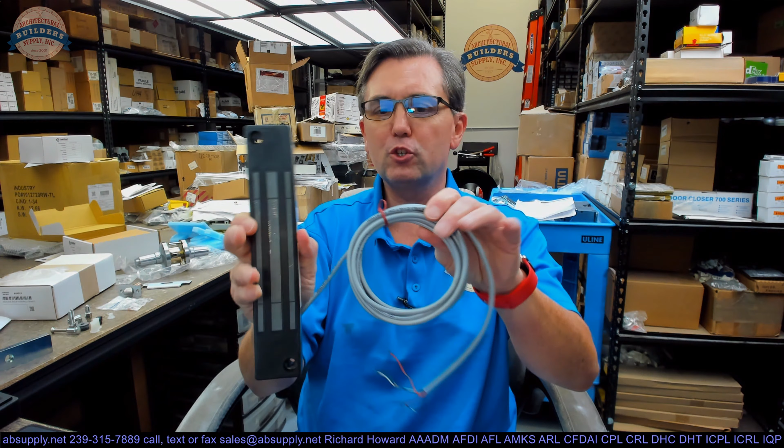Okay, so let's talk about what this is. Let's do a visual tour first. Obviously, you're going to get the magnet. So first of all, this is what is called a face mount, meaning rather than attaching it from the underside, you attach it through the face of the unit.

We'll look at a couple of diagrams in the installation instructions, but Maglocks are generally mounted on the push side of the door, right? So it's going to be mounted to the underside of the header, then the armature will be mounted to the face of the door. The door will come closed and make contact like this. Well, what if you were mounting it on the pull side of the door? What would happen in that instance is you would likely mount the magnet on the header.

Just in your mind's eye, think of a cross-section of a door and frame, a head detail. Mount the magnet on the face of the header on the pull side. The door is closed. Now imagine an offset bracket that mounts to the face of the door and then comes up in a Z fashion, and then the armature mounts to the inside of that Z so that it will close to the face of the magnet.

So if you have an in-swinging application and your hardware's on the inside, and yeah, it does happen occasionally, you're going to need a face mount. Making it work in a non-face-drilled application could be accommodated somehow with weird angle brackets and whatnot, but you ideally want a face mount model.

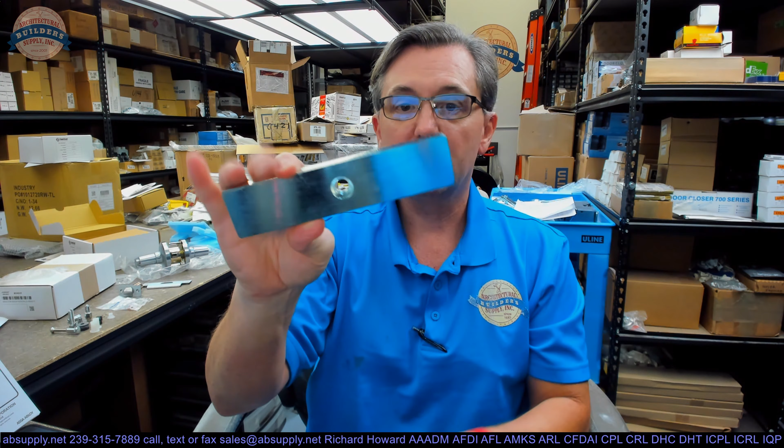So then we have our armature, or our strike as they call it. This is going to be mounted to probably an angle bracket or whatever you're installing that to. That's going to be through bolted. The fastener for that is here. Let's actually go through the fasteners. We have a couple of Allen drive machine bolts. That's going to be for the body going through or into the header.

Before you get there, though, you're going to have a couple of what would be called blind nuts or riv nuts, or I guess collapsible nuts. You need 2 of them, obviously. One of them is going to come with the tool already installed. So what you see here is when I remove the riv nut, this is the tool, everything here.

You drill the hole, push this in, bring your tool, and then tighten with an Allen wrench, and you'll collapse that riv nut onto the thickness of whatever you're installing it to, your hollow metal frame, your aluminum frame. You keep tightening until it completely collapses. And the installation instructions say, be sure you're pushing forward so that it doesn't creep out a little bit. Lots of forward pressure and tighten that down.

Once that riv nut is collapsed, you'll do it the second time by removing the tool. Everything down here with the bolt is the tool. You will certainly have a couple of caps for the body that are going to allow you to cover off your installation so that it looks nice and clean. Then you're going to have your sex bolt and your machine bolt for the armature or the strike. You'll have some other components here, and we're going to go over those as we get into the installation instructions.

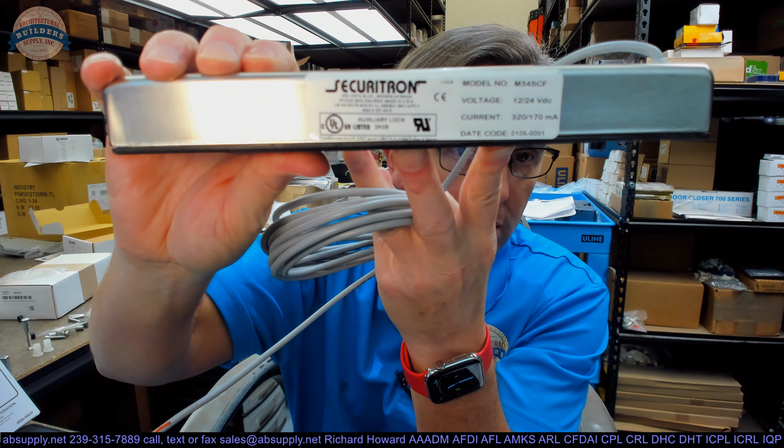Now, admittedly, as I had said earlier, this is a discontinued model. I do have some archival catalog information. I can tell you that it's auto sensing. This will run on either 12 or 24 volt. You don't need to worry about what it is. The coil will handle either condition that you bring to it. Let's switch to the screen view and let's look at all the supporting information.

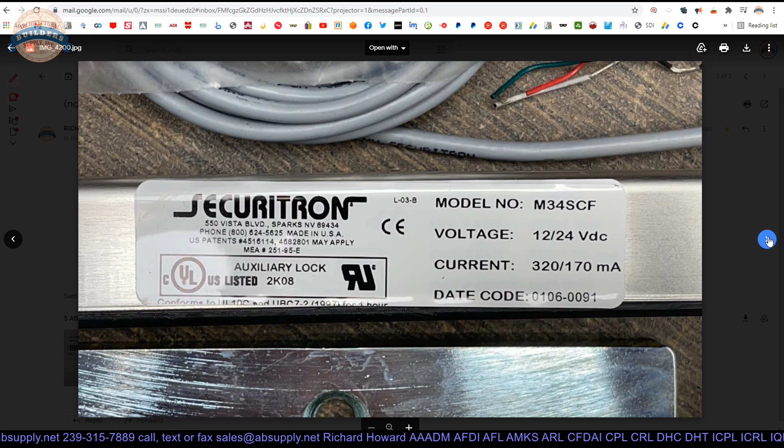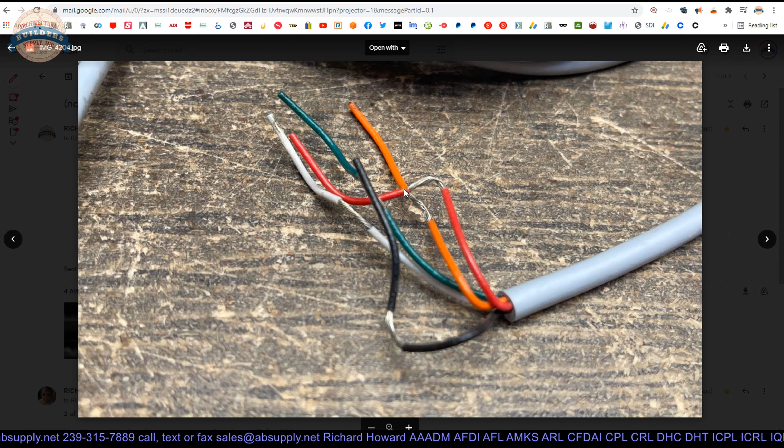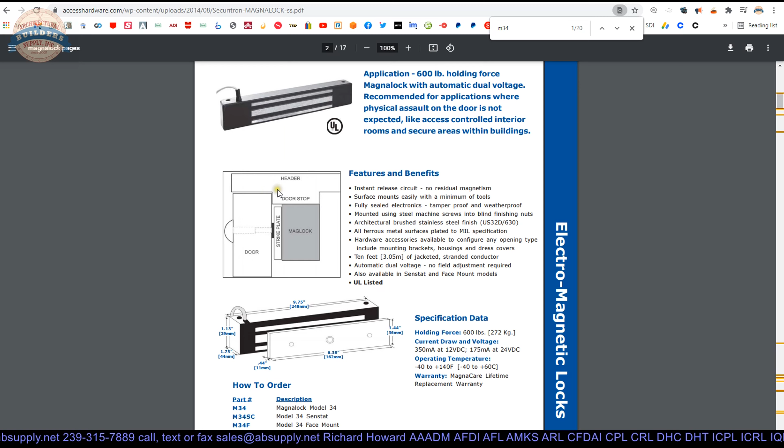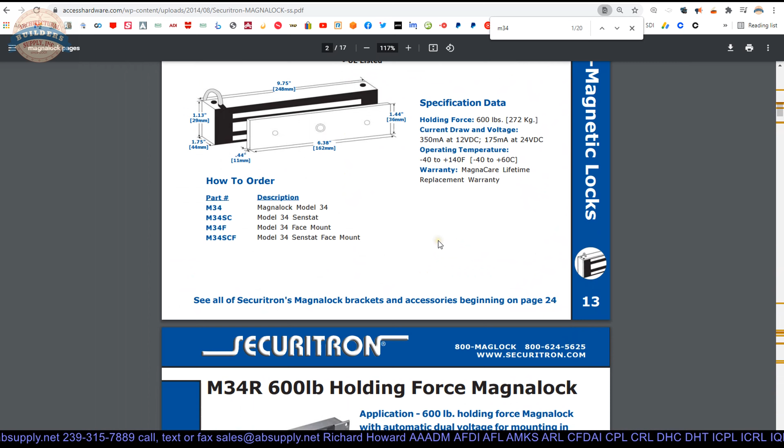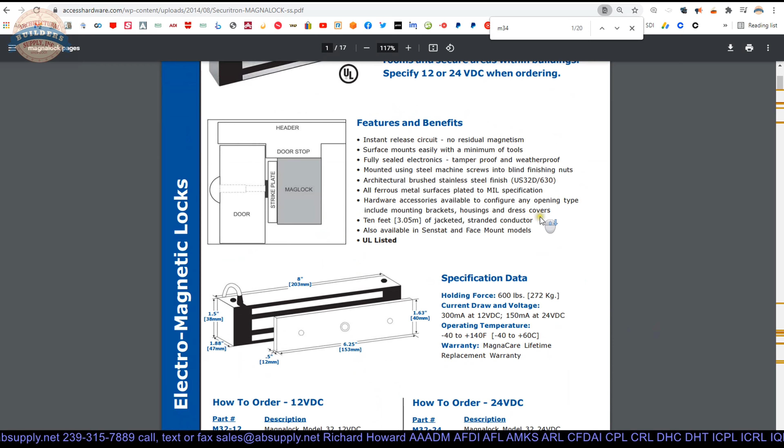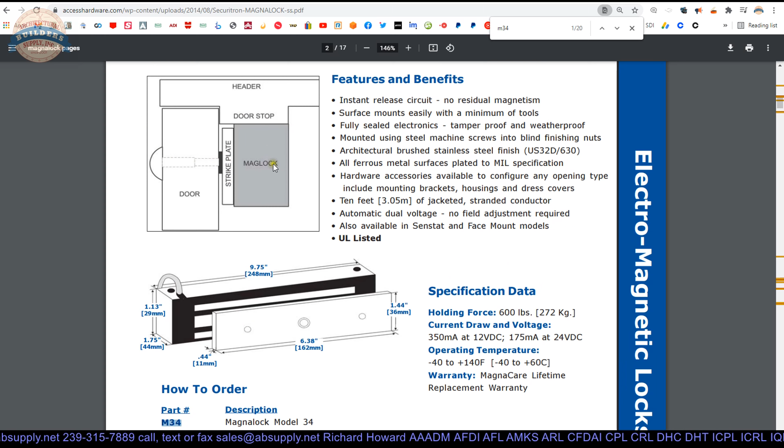Okay, now let's take a look at the cut sheet that's down below. A single-page document that shows us an overview of this M34 magnet. Now, I don't know the year of this document, but I believe it to be pre-2012, and I say that because I know it's pre-2012 because the M34 is not in my 2012 catalog. So here's what you're looking at. Now the M34 here, this is just going to be a straight M34 that you see drawn here. Well, again, if you needed to take this body and mount it to the face of the door, you're going to need bolts through the face.

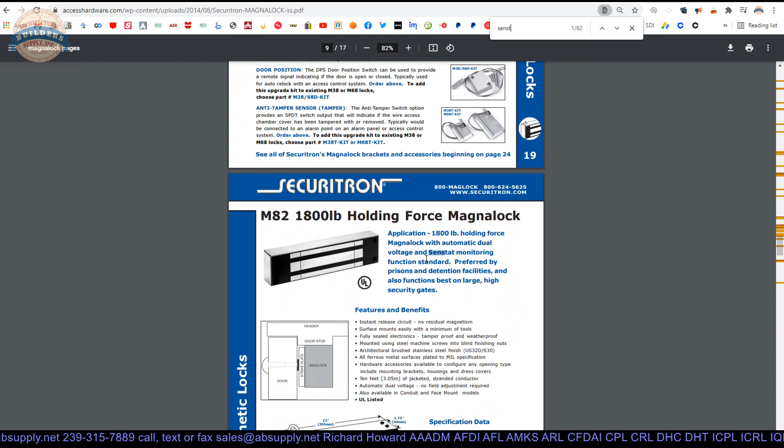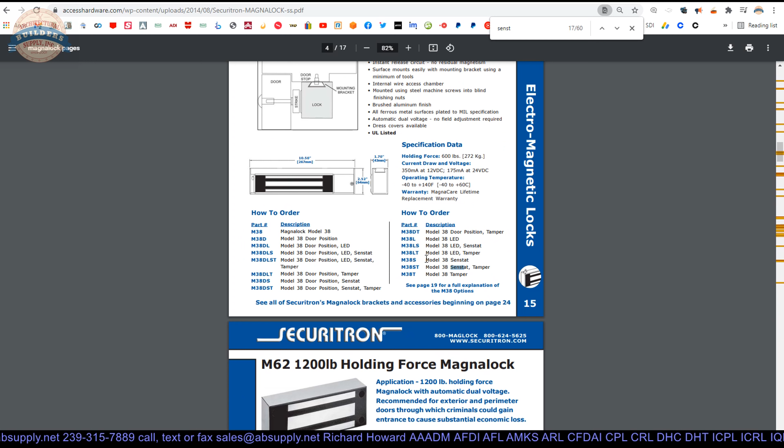So Senstat is a term that they have in here. It's a marketing term. And I don't know if it's going to be defined in the product catalog. It ought to be. Yeah, sure it is. Senstat. The Senstat option provides a lock status sensing signal which positively indicates that the door is secure. This interfaces with access control or alarm systems and is superior to the commonly used door position switch, which indicates that the door is closed, but not that it is secure. All Senstat Maglocks use a Form C switch. Okay. Form C just means a single pole double throw.

Why is it superior? Well, it's superior because it's completely concealed. Nobody knows that you have a door position switch over the opening. You couldn't tell at all. It's also superior because it tells you two things. The door must be in the closed position for this to work, and it will report back by changing the state of the Form C switch that it's secured, that you have a magnetic bond. So it gives you both a door position switch and a magnetic bond sensor as well. So it's a two-in-one sort of situation. That would be why I would imagine they are going to call it superior.

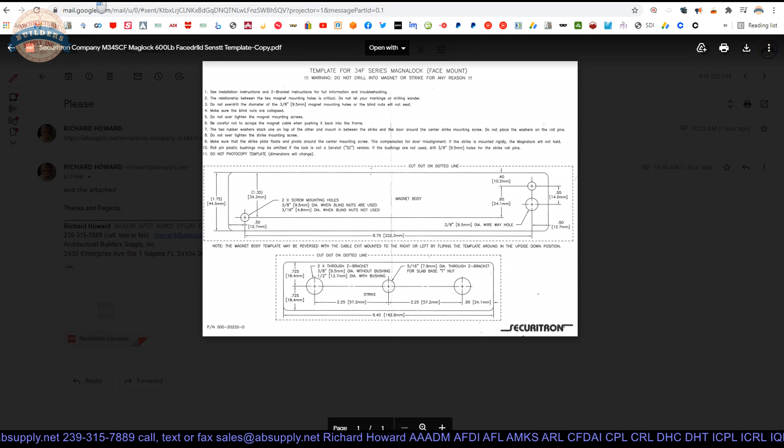Okay. Now we also have the template. This is packaged in the box. I couldn't find this online anywhere, but anyone looking in the future will find it. Full-size paper template. That's going to allow you to apply that right to the opening, right to the header. Okay, so we have that template there for you to review. They're going to want a 3/8 diameter wire hole right there. 5/16 hole through Z-bracket for slab base with the T-nut. Yeah, okay, we've got that.

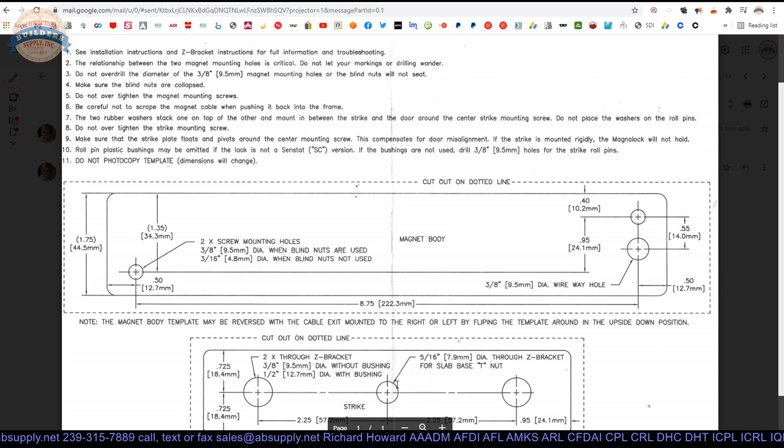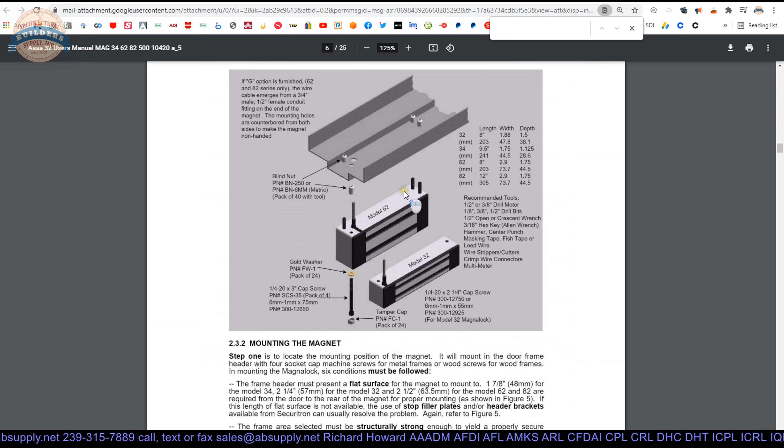Now, installation instructions, here they are as well. What is supplied does not specifically refer to the M34 face mount. But we'll scroll through here and pick out the important concepts. Here's a great way to look at a standard unit, how it mounts. That's obviously mounted on the push side of the opening.

Well, if you need to flip that around, and by the way, the other components that I didn't draw your attention to earlier, those washers are in there. Those bushings are there with these roll pins. And the roll pins are going to fit into the back side of the armature. On the back side of this, it has a couple of small holes that are drilled. Those roll pins are going to fit in there. A couple of rubber washers. And there is this bushing as well that's there underneath the bolt. You have a lot of force. When the unit is energized and the door comes to the closed position, it's going to grab that magnet. Those rubber washers are there to help deaden all of that.

So these two bushings, the roll pins, this bushing, this male bolt, then the female sex bolt really is what it is. The rest of that's all in the package. There are a couple of washers here as well. Small zinc dichromate washers. I don't, at this moment, know where those go.

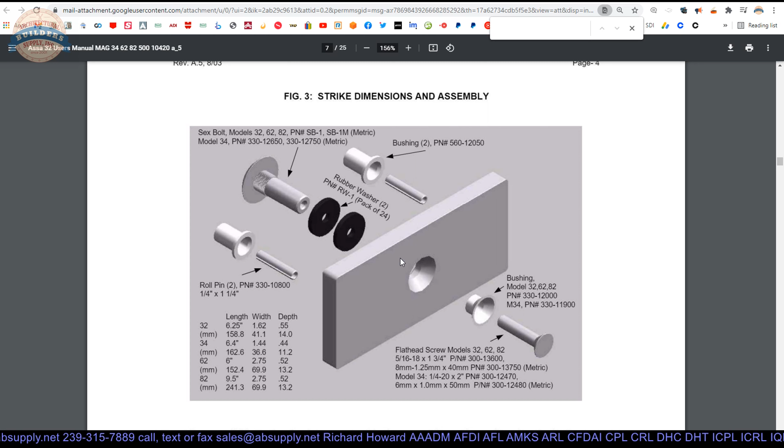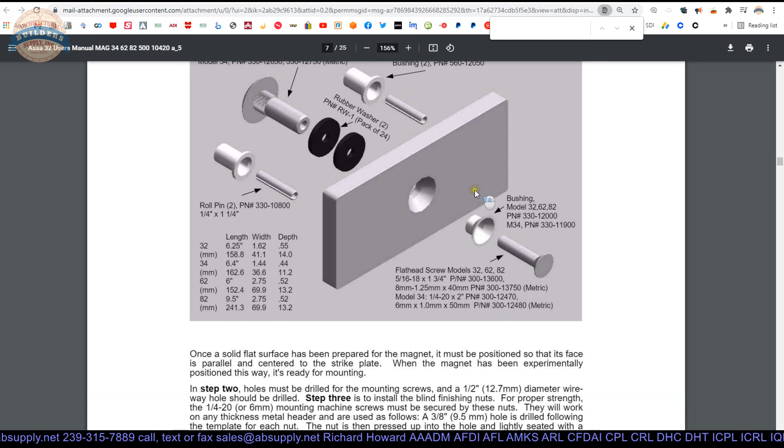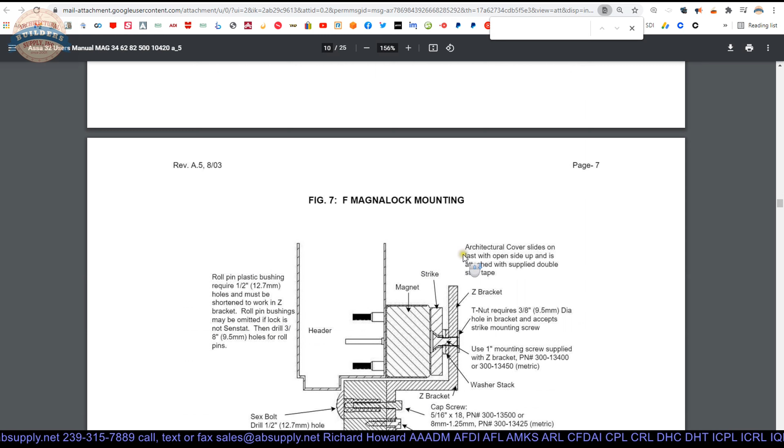I'm pretty convinced that, yeah, okay, that's probably where they're going to go. Let's take a look. Yeah, there it is. That's exactly where they go. These gold washers go underneath the head when we're doing the face mount, which is right here, basically. Nope, that's not the face mount.

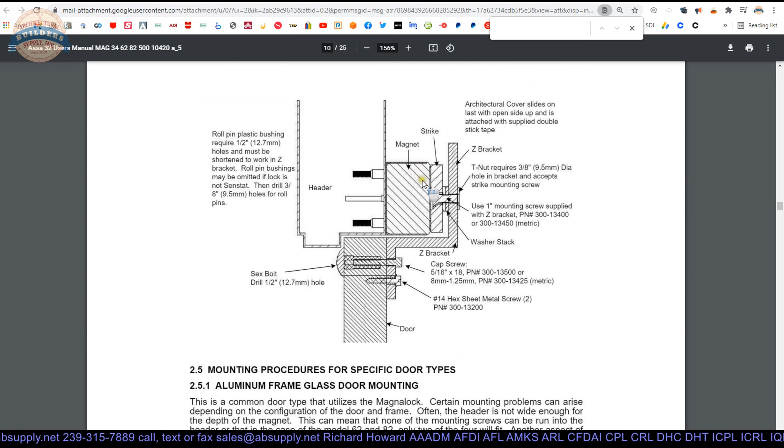In swinging door. So they show a 32F. What they're not showing us here are the bolts that go through. Well, the washer, this gold washer, will go underneath the head of the unit. Coming back up to where we were, here's the tool to collapse the blind nuts, or riv nuts they call them.

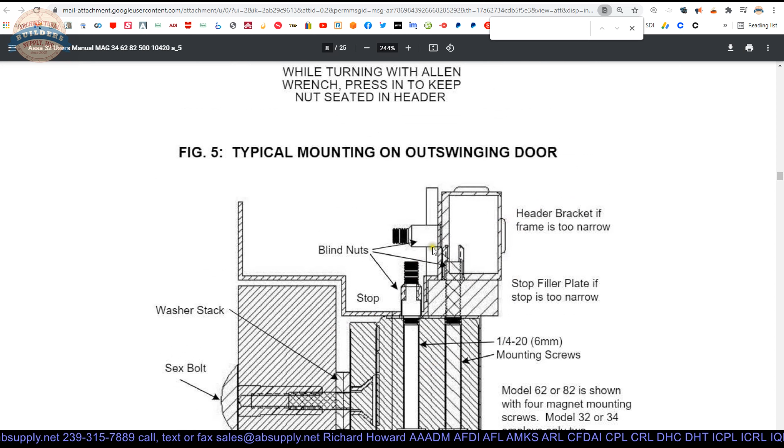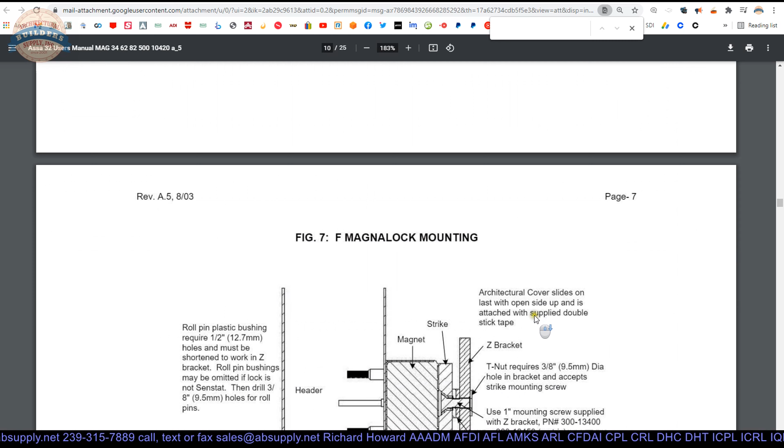This is an outswinging application, not what we're doing. They're showing this because if you have a very narrow frame, there is a header bracket that can be ordered and installed to accommodate this very narrow jamb depth. Now our face dimension, a 62F, this will serve to help us understand what we're installing. Those rubber washers go back here.

And I think what they're allowing us to have with this design here, it's going to be secured through that with that bolt. Well, the door closes at an angle to the face of the magnet. So having these roll pins and these bushings installed prevents any sort of rotational force from making that unit rotate over time.

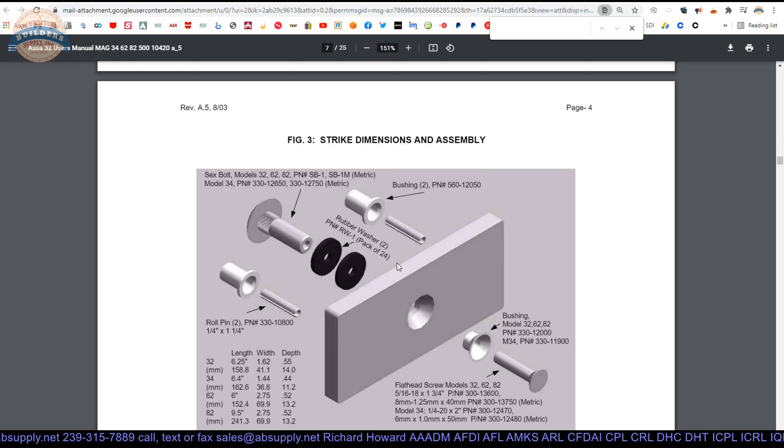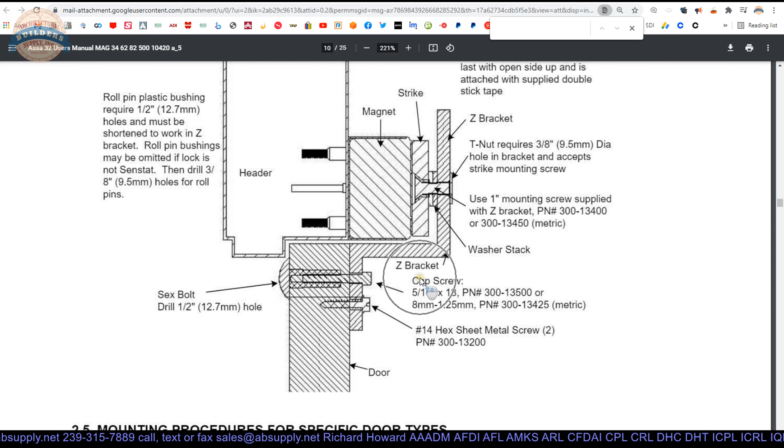Those roll pins are going to need to be there. The rubber washers will allow that to pivot on its axis ever so slightly, but the pins keep it from rotating. That's the last thing you'd want, for the thing to no longer be exactly parallel to the face of the magnet, because the problem is you'll lose your holding force at that point.

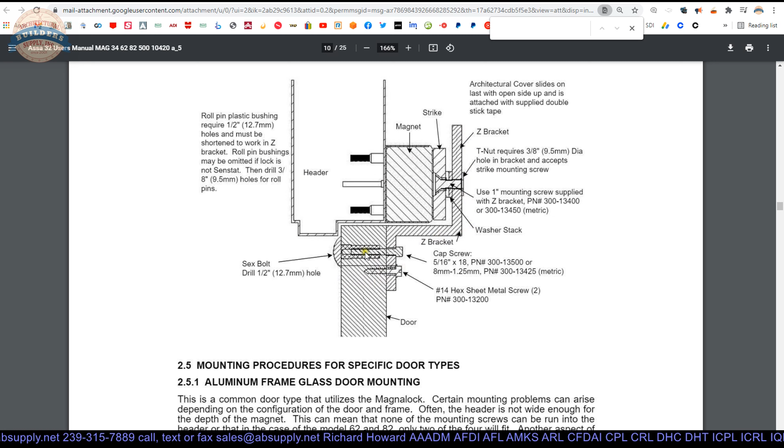And this shows, this is really the installation that you're doing. This client did not order a Z bracket. Maybe they're doing some application where there's a custom gate that they've built and they've incorporated a Z bracket into their design. But there you go.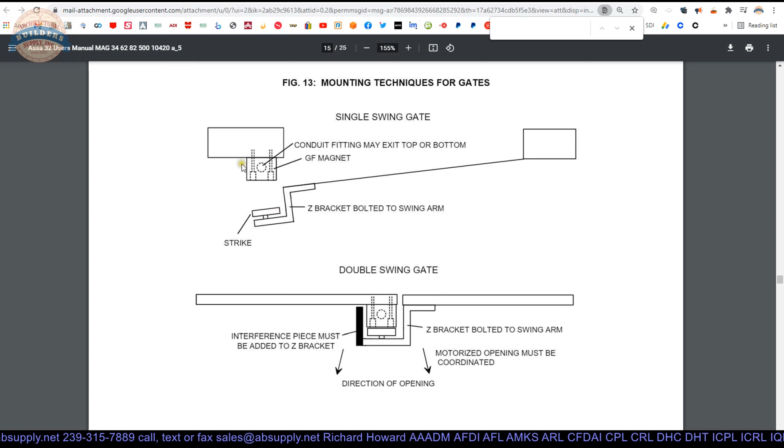application. This would be exactly perfect for a face mount in a gate application. Obviously not exterior, but if you're doing manufacturing and you have machinery that needs to be secured so that access just isn't open to it, you'd have a custom gate. That is where you might see that. That's your face mount.

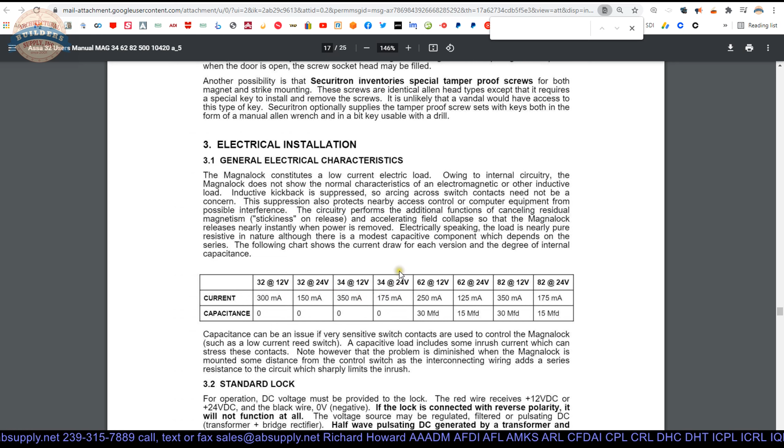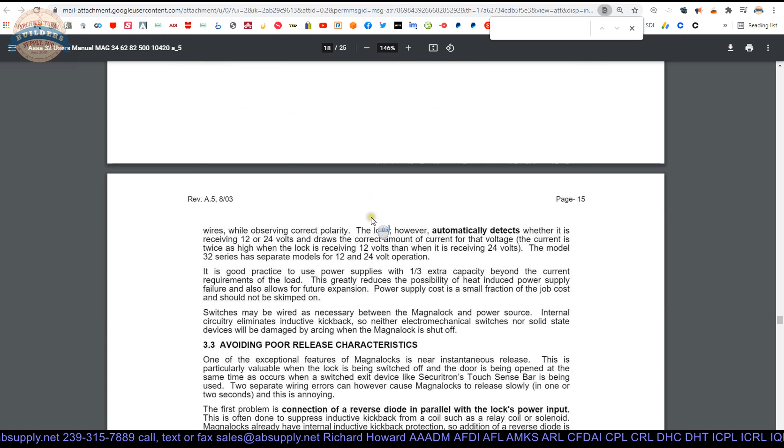Okay, now getting down to the end of this, electrical characteristics of the unit. This is obviously very important to know how many milliamps you're going to pull based on your voltage. As voltage goes up, milliamps go down. That's just E equals I times R. That's simple, basic electrical theory. 24 volts, I imagine, would be more common, but alarm systems are very commonly 12 volt.

And what I want to get to is the wiring diagram. This is important to know. People ask, how far away can my power supply be? Well, that's got everything to do with the gauge of the wires. An electrical circuit has 4 components: the switch, the load, the power supply, and the conductor. The bigger, thicker conductor you go with, the more it can conduct. Friction goes down as the gauge of the wire goes up, so be mindful.

This is your maximum distance. What will happen is you won't get adequate voltage, which will translate to the unit not working, working intermittently, or working at a substantially reduced holding force. And I never really did mention what this holding force is. I'm quite sure it's 600 pounds. That is definitely an oversight. Yeah, 600 pounds is what we're dealing with.

And when it comes to maglocks, that's one of the first questions. What's the application, and then how many pounds of force do you need? 600 is certainly typical, but not appropriate for much higher security needs where you'd have over 1,000 pounds.

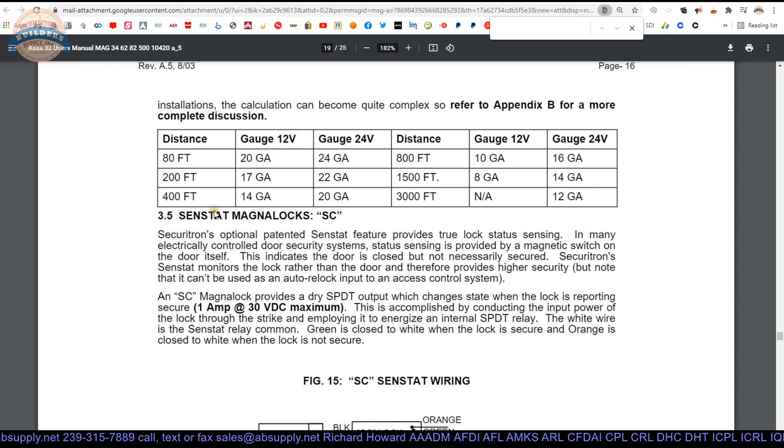Here's the definition again of Senstat. I won't read that again, except to say the SC Maglock provides a dry single pole double throw output which changes state when the lock is reporting secure. 1 amp at 30 volt DC maximum, meaning the switch is rated for no more than 1 amp to go through it.

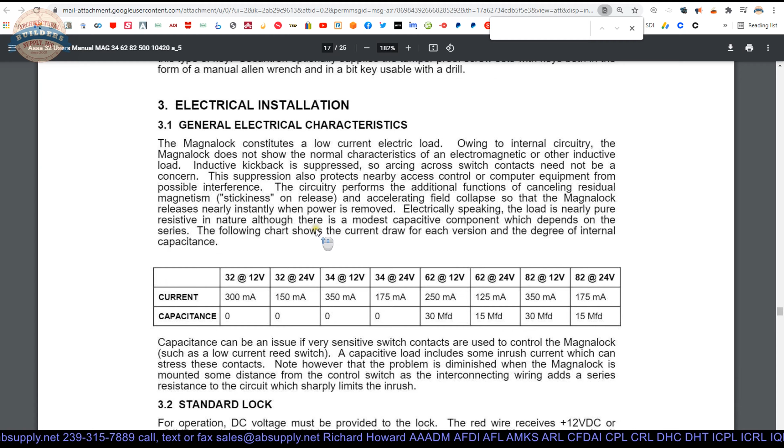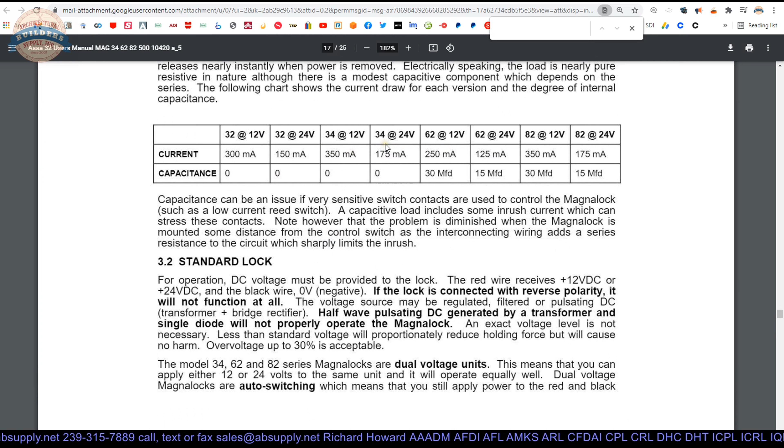We just discussed that. We looked at our amperage requirements. You're a third of an amp in 12 volt. You're a fifth of an amp in 24 volt, basically. So be mindful that switch is rated for up to 1 amp.

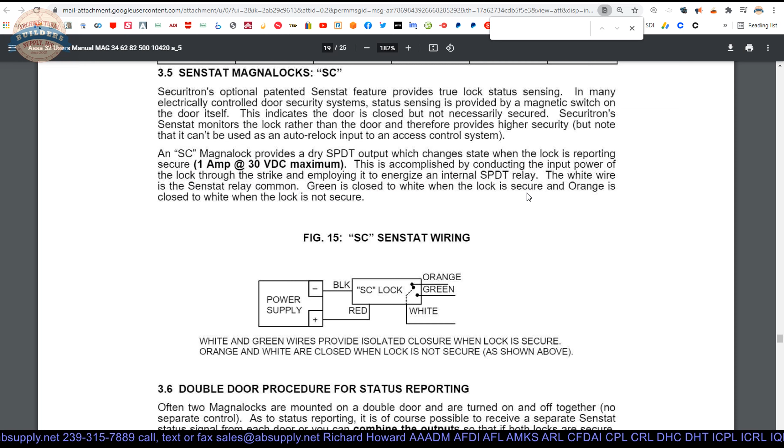This is accomplished by conducting the input power of the lock through the strike and employing it to energize an internal relay. Right. And with that absorbing the inductive kickback, you're looking to help preserve the life of the relay that's inside of here, or of the switch. The white wire is the common. Green is normally closed to white when the lock is secure. Orange is closed to white when the lock is not secure. So here's your wiring diagram of that.

Basically what this switch does is, when you take it out of the box, it's going to be normally closed. When you wire this up and close the door, that's going to throw that switch to normally open. So that means that when the door is opened, it's going to fail closed, which means it will complete a circuit. And you can wire that the opposite orientation as well.

White and green wires provide isolated closure when the lock is secure. White and green. Not secure. I think I just said that backwards. So this may be showing when the unit is in the open position, when the door's in the closed and energized position. Yeah, so I would say that this is normally open, so that when you close the door, you'll have continuity of the circuit by means of the white and green wires.

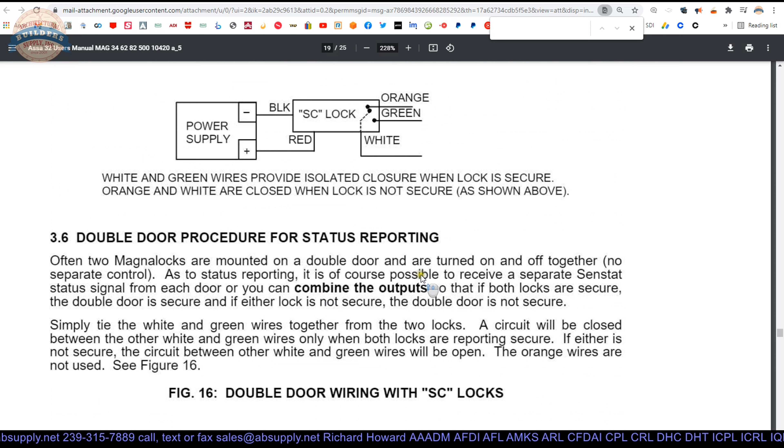White and green wires provide isolated closure when the lock is secure. So when you take it out of the box, it's going to be normally open. You close the door, this leg will fall to the green, giving you continuity in your circuit. And that's the wiring. You've got your red and black to your power supply. You've got your other 3 wires coming out of the unit, and that's going to go back to whatever that Senstat Form C switch is reporting to.

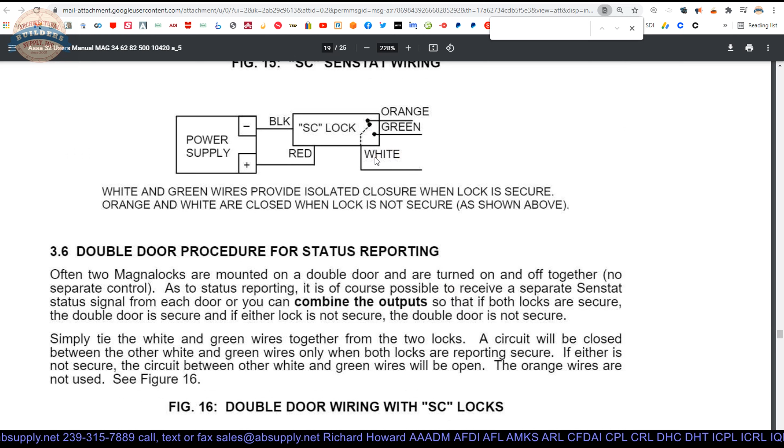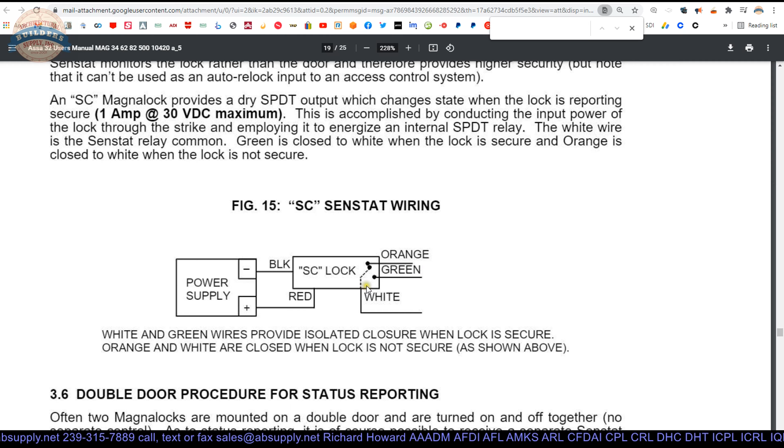Access control, computer software. Maybe it's an annunciator. Maybe it's a LED light. Something's happening when that changes state, assuming that you're installing it to begin with. You may not be. You might just be doing simple on-off. And in that case, you would tie those 3 wires off because you wouldn't use those at all. More wiring should you have a double door, etc.